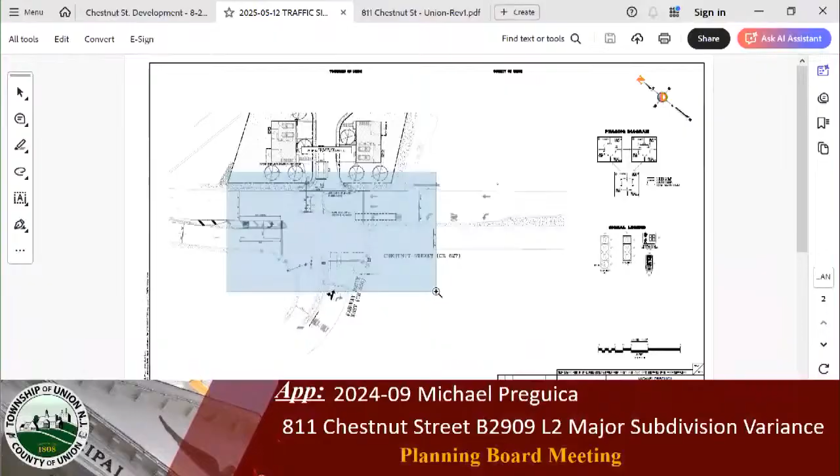Let me zoom in to where I think one of the board members had a concern. You have two lanes going northbound on Chestnut Street, and then it opens up to three, and that third lane is sort of a storage lane for the left turn lane at the next signal. There was some concern whether we'd be eating into that, and I'm happy to report that no, we're not.

With just a slight shift of the striping in the southbound direction, we're able to fit that left turn lane for this property without really changing anything else. So essentially, the way that signal operates now will be exactly the same unless a car is trying to make a left out of our driveway, then they'll get a few seconds of green time and back to the way it was. So what I testified to still holds true, but we've now verified it with this layout.

Those were two good points brought up by your engineer—I forgot which board member was asking about that turn lane—but we're able to verify that we can make that fit. That was really my homework from the last meeting in terms of the traffic signal plan. The site plan was changed to address some county comments, nothing substantial, just some minimal things. We now have county approval for the plan. They'll have to review the traffic signal plan in coordination with the township, but those finer details, like how the wiring goes, come later in the process.

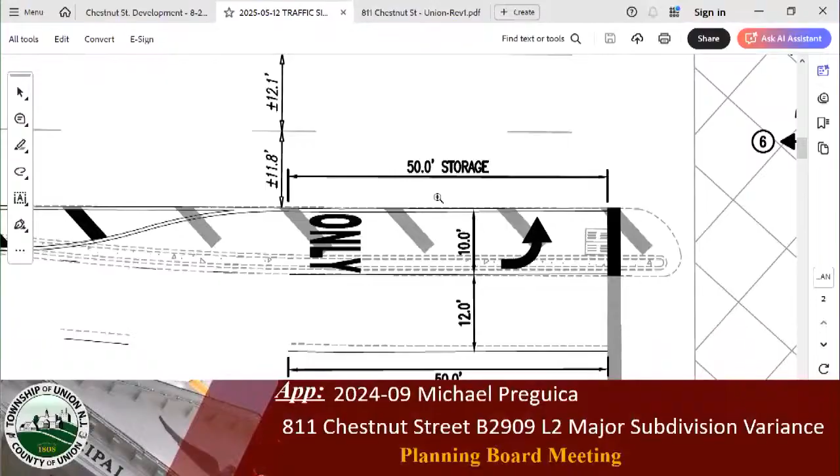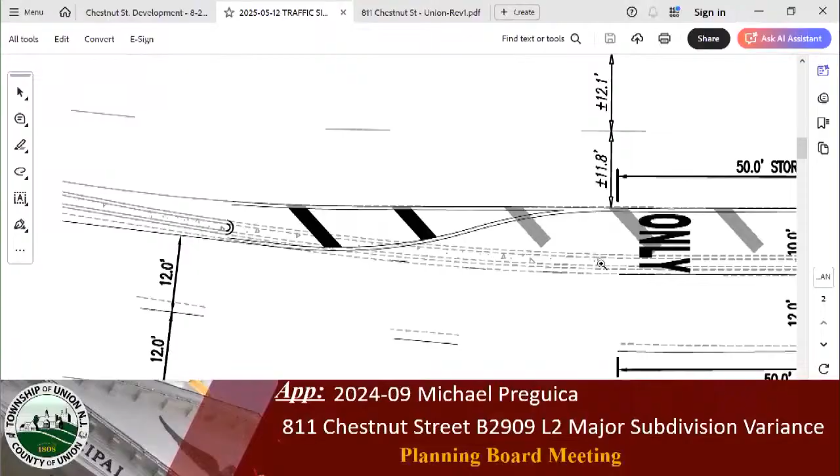And are you removing the cement divider? Yeah, in that section, that'll be removed, and it'll be pulled back to before that turn lane starts. You can see right here, that little bull nose—so this is where the divider is today, where it's dashed. So we'll get rid of that, but not on the northwest side? Correct, not there—still there. Okay, thank you, sir.

Yes, appreciate that, thank you. You asked me last time about that, yes sir. I did, I remember. So just as a follow-up to that, that diagram does indicate—could you enlarge it again? Sure, the turn lane? Yeah.

So you are taking out a portion of the new lane that's created for the left turn at West Chestnut Street, on the other side, under the bridge? No, we're not. Well, it appears that you are, because you've got the dark—this is the lane right here, this is the same lane. See, there's three lanes, this is the lane that goes—but there's actually, what are the dark stripes, diagonal stripes to the left of the last gray stripe?

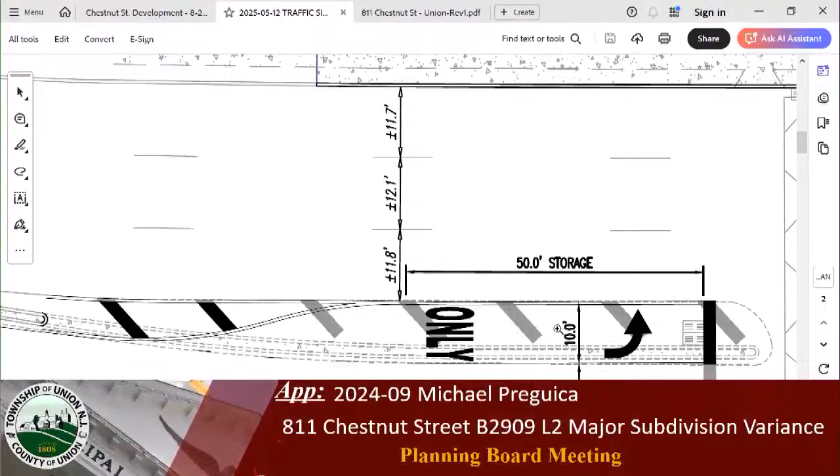Yes, those are the same ones that are there. These two stay, the rest of these lighter gray ones are removed. So that's existing striping? Yep, we meet the existing striping along this side, somewhere right in here.

Okay, I was listening, but I didn't hear you say - will the adjustment to the traffic signal be a 4-way signal now? Yes, 4-way.

So the signal will control left turn lanes out of the property to Chestnut Street South? Yes, if you come out of the property and stop at the stop bar, it'll call the signal and say somebody's waiting there. If you make the right turn on red, it'll cancel that call, so it'll never give green. Only if you sit there long enough will it know you want to make a left or go through, then it'll give a few seconds of green, whatever the minimum we can get away with, since the most you'll have is one car, maybe a second car occasionally, so it doesn't need much green.

And we don't want to take away from the busier traffic. Does DOT have a minimum amount of seconds the light has to be green? For DOT turn lanes, it's 5 seconds, 7 seconds for through movements. This is kind of an odd situation, so if this was a DOT road they might want it 7 seconds, but it's not - it's up to Union Township and Union County.

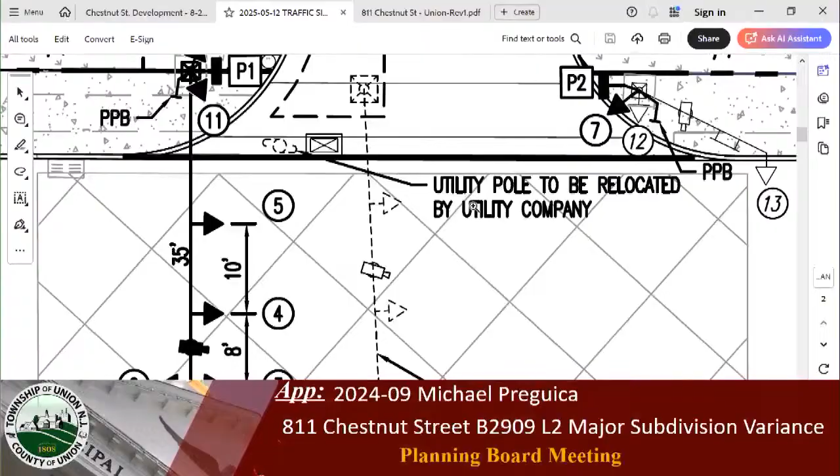There's no crosswalk across Chestnut Street to get to Fairway Drive? Doesn't look like it, no. There is a sidewalk along Fairway Drive. There is on this side, yeah, I see it. No, there's no crosswalk. Okay, thank you.

And there's no pedestrian signals either. This signal pole is existing. There's no pedestrian buttons or anything. So are you saying there's no pedestrian signaling, no ability to initiate a pedestrian call on the intersection at all? Not to cross Chestnut, no. Not to cross Chestnut? Right. The only pedestrian crossing would be crossing the proposed driveway.

But I would think that would be an issue for the local police department and traffic control as opposed to egress from the applicant's property. Right, yeah. There's a reason, when this was designed, that they didn't put a pedestrian crossing across Chestnut, so it would remain to not be there. That would have a pretty big impact on traffic, because that's a long crossing, so you'd have to have a fairly long walk and flashing don't walk for that. I would think that's probably part of the reason why. And I don't know if there's that much pedestrian demand across that.

So let's say if you are a family from the Fairway Drive area, that means there would not necessarily be any safe route for them to walk from that neighborhood to Connecticut Farms School. Can you cite any path whatsoever that would be a safe way for them to walk from the Fairway Drive neighborhood to the school? No, I wouldn't have looked at that. That has nothing to do with this project. Whatever it is today is the same. Exactly, we're not changing the pedestrian patterns here, so they're staying the same. The only difference is when you're walking on the sidewalk on the north side of Chestnut Street, now you walk across a driveway to 6 units, that's it.

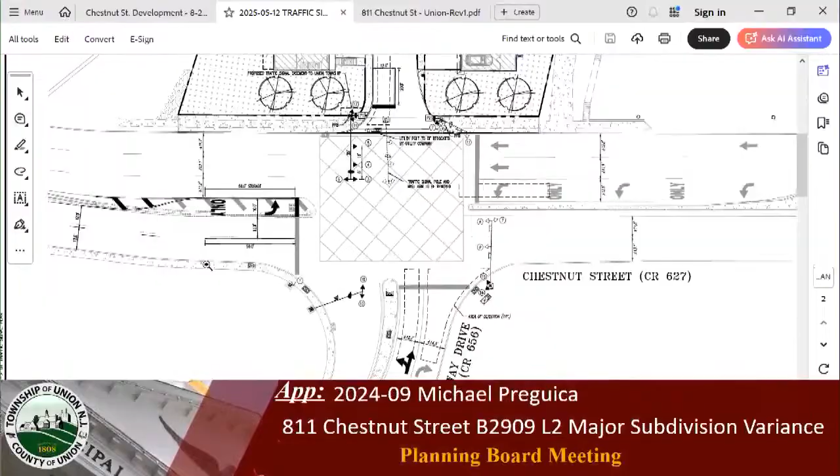Okay, so going back to where you're saying you're going to make that lane a turning lane - the traffic coming off of Stuyvesant Avenue onto Chestnut, those are already 2 lanes that are there, right? And will those lanes now be narrowed just to add that 3rd lane there? Yeah, the rightmost curb lane will be 1.5 feet narrower, yes.

It's extra wide now.

I have a lot of questions. I'm just trying to go through so I'm not repetitive. All right, I'm done with my questions. I have more statements towards the end when it's public comment. Thank you.

Thank you. All right, would you like to call your next witness? Yes. I will be calling our architect, Chris Juchnick.

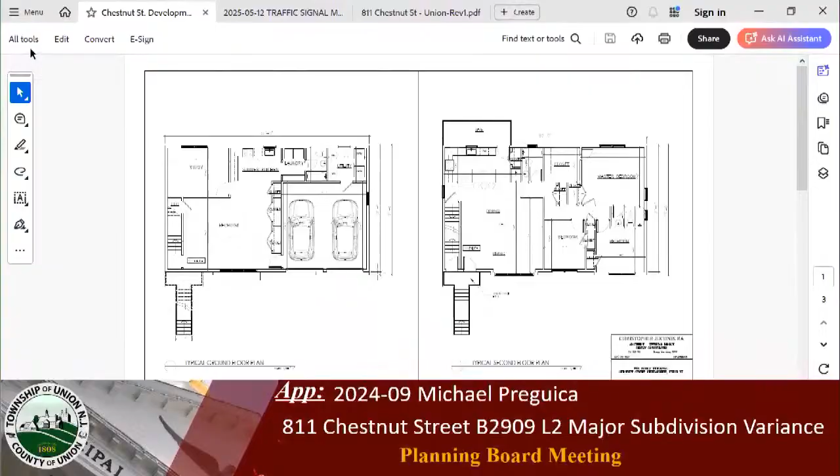Can you take us through the floor plans, please? You should have A1, up on the screen now, showing our typical ground floor plan. Typical meaning it's the same for 3 houses, three two-family houses, giving us 6 units, not 6 houses but 3 two-family homes. On the ground floor we have a double garage off to the right in this particular plan. Next to that we have a rec room, a study, a summer kitchen, a laundry area, and a bath and utility area. Then we have the staircase bringing you up from the ground level directly to the second floor. It's directly interconnected - there are no other entrances on the ground floor from the outside other than the garage doors.

As you come up the stairs from either the ground floor or from the exterior, you have a wide landing upstairs allowing you to enter the one door into the second floor apartment, or go left into a staircase up to the third floor apartment. We have the entrances separated on the outside of the building so we don't have to sprinkler it. If you have your entrances on the exterior, the IRC 2021 New Jersey edition does not require a sprinkler system as long as all fire ratings are maintained throughout the building, which we would of course do if this is built. This is very typical of many, many homes we design and construct.

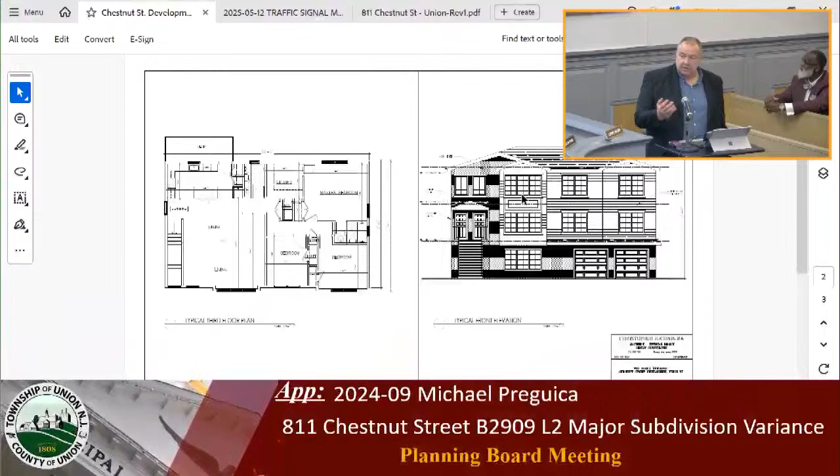Then we have our front elevation. We drove around the neighborhood - there's that little development off to the side, which is a mixed bag of different designs from a couple different time frames. We actually designed the owner of this property's house off to the side, the gray-blue house with the siding. That's the same kind of siding we'd propose for this building, the horizontal Hardie plank board, a nice architectural feature. The rest of the front would be brick, with some accents on this projected window, like a larger bay that comes out, giving the building a bit of a 3D effect.

Coming around the side, it's just going to be Hardie plank siding, with the bottom level being plaster over the block. The block would be up to the second level, and the rest of it will be frame. You can see the profile of the decks that we're proposing on the rear, and here we can see the actual decks themselves.

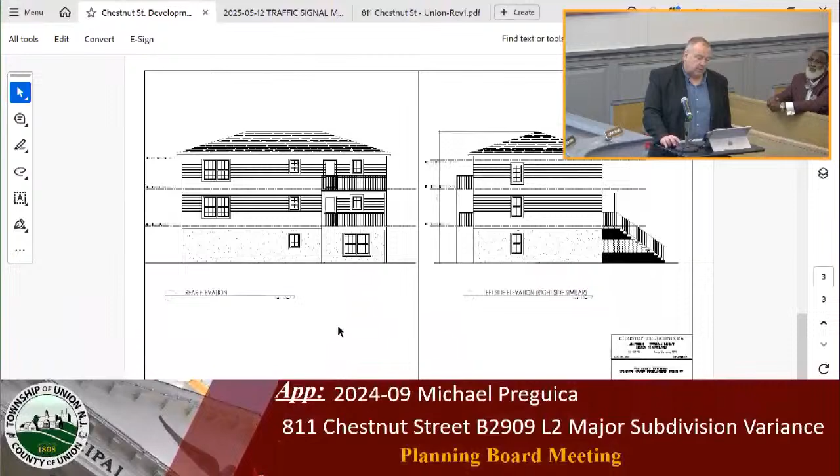As I mentioned, we're very cognizant—we do a lot of drawings in urban areas, and one of the biggest concerns is having direct connectivity between the ground floor, which we usually call the owner's unit, and that second floor unit. So there's direct connectivity and no other access other than from inside the unit, to try to dissuade people from making illegal apartments. And that's basically the building.

Can you please describe how we're complying with the energy conservation ordinance? Yes, so we are required under a federal mandated program called the Res Check. We have to run the numbers on these.

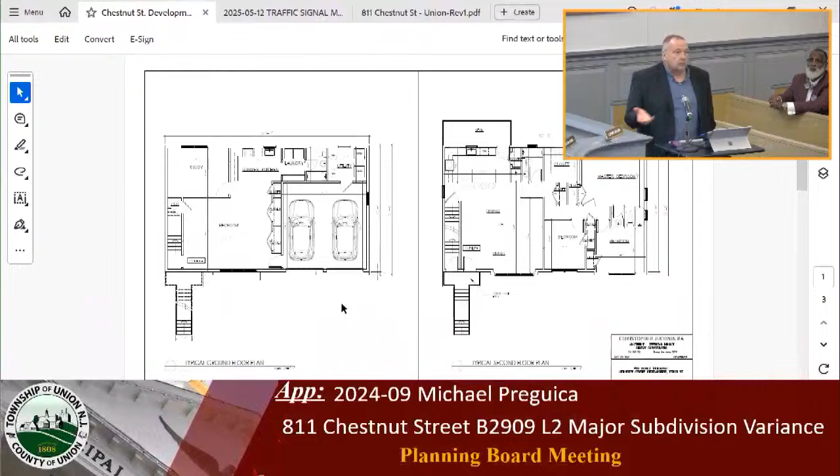Nowadays it has to be 2x6 construction on the outside walls, which allows us to put a certain amount of insulation inside. We also usually put insulation around the outside. The attics are insulated about twice as much as houses used to be. And we'll be using LED lighting throughout, so all of the materials are compliant. Once you pass that Res Check, the building is pretty energy compliant.

And we have no problem complying with Collier's report or any other comments the fire department has—we should be fine with all of that. Perfect, no further comments or questions? Okay, we'll now take questions from the board.

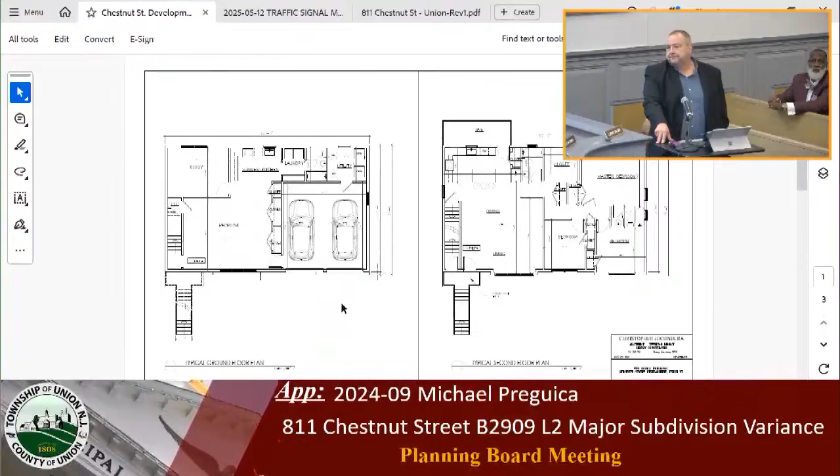If I can kick off some of the questions here, and I'll defer to other board members—so you have read the engineer's review letter, right? Yes. And just confirming, comment 3.1 of the engineer's review letter states the ground floor is shared by the families living on the second and third floors for garage parking, recreation, laundry, and summer kitchen purposes. That's correct? I'm sorry, yeah.

No, so the ground floor is only shared by the second floor. I actually didn't realize—I must have read that a little too quickly. The ground floor is only interconnected between the ground and the second floor. The third floor has a separate entrance and has nothing to do with communicating with the lower level. Okay, because the second floor is the only floor that would have access to that ground floor without needing to go outside. That is correct. Okay, thank you for that clarification.

So based on your plans, in that ground floor area, in addition to the laundry, the quote-unquote summer kitchen, study and rec room, you also have a full bathroom, right? That is correct, yes. And that full bathroom consists of a toilet, bathtub, shower, sink, et cetera, right? That is correct, yes, it is a full bathroom.

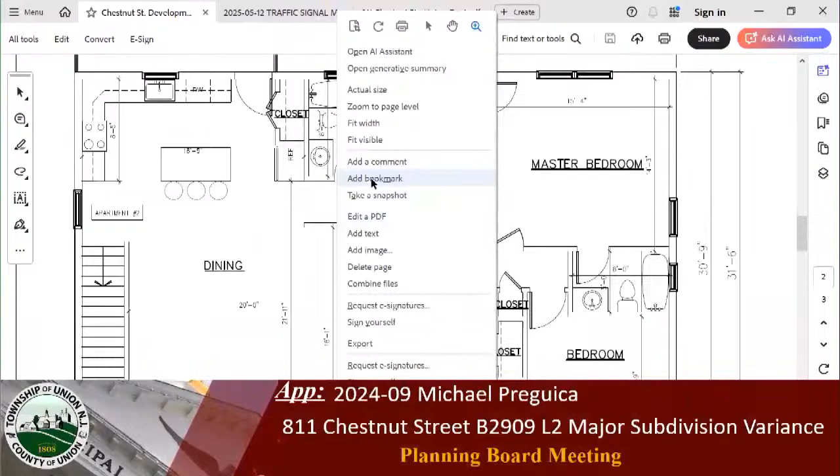So you've got 10.3, I'm sorry, go ahead. It's a 9-foot ceiling height for the second floor, and 8 feet for the third floor. 8 feet, 9, 9, 8. Okay, so what is the overall dimension? Looked at a dimension to the side. What does that say on the elevation?

34.6. Okay, the maximum permitted building height is? I'm asking, that was the question. What is the maximum permitted building height per the RB? 32, I'll tell you, 32, yeah. So you're asking for another variance in height, correct? Yes. Okay, I didn't understand that as being one of the variances.

What percentage did you pass your res check by? Do you recall? We haven't done the res check yet. Oh, I just thought you mentioned you did a res check on this building. We do the res check when we do the construction drawings, that'll let us know whether or not. So how do you know you're passing the energy code? Well, the house itself, the actual guts of the house haven't been designed yet. So the insulation, more than likely, when we do the res check it will let us know, due to the square footage of the house and the windows, how much exterior insulation we'll have to put on it. We already know 2x6s only receive R21.

We can get about R60 up in the roof. Understood, that's the best we can do. Acknowledged. So the exterior envelope could have anywhere from a quarter inch up to an inch of exterior insulation, exterior continuous insulation, am I correct? Yes, you are. Is that what you're, I'm asking you to tell me. Yeah, continuous insulation. Okay, so you're going to have continuous insulation on the outside, then cavity insulation of what, between the studs? The 2x6s, sir. Yes. Okay, what would that be?

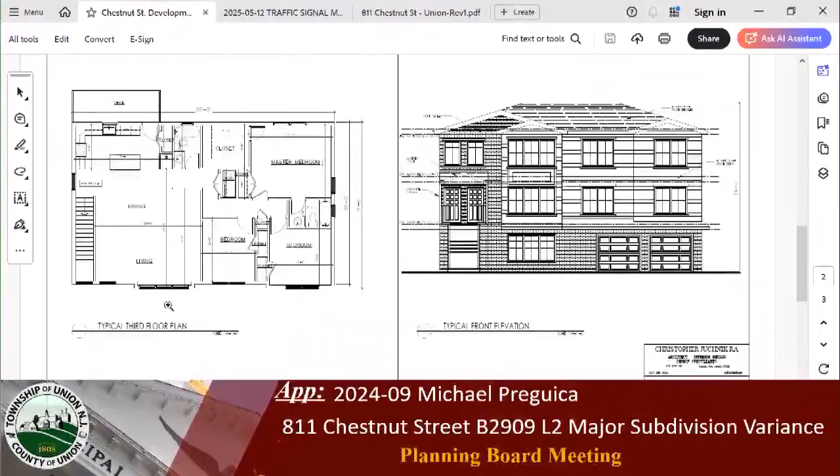The entire apartment, it's continuous. So the stair is not rated, the entire apartment is rated? That's the question. Yeah, it's rated as an extension of the staircase, I guess you'd put it that way. Because that's not a rated stair.

Because the thing is, a rated stair has rated doors. Is it a question? I understand it's a question, but I'm following up. What's the question? I just asked the question, and what I'm saying is that the stair is not compartmentalized, therefore it is not rated.

It doesn't need to be rated from itself because it's one continuous path of egress that runs from its own unit straight to the exterior. So that's how it's rated, not in itself.

The definition by code of a rated stair is: a rated stair is compartmentalized, and a 1-hour stair has a 3/4-hour rating, a 2-hour stair's got a 1.5, and you know that. So therefore, that stair would need to have a door that is a rated door for that to be a fire stair. But it's not required to have a door, therefore it's not a rated stair. Am I correct?

I get that, and at one point I said I don't want this to be a grilling session. No, I am, but I'm not getting answers, ma'am. So that's why I'm trying to.

Does a rated stair need to be compartmentalized? A fully rated stair has to be compartmentalized, yes. So is that a rated stair? It's not a rated stair for its purposes, no. Okay, so it's not a rated stair, correct? I'm not exactly sure what it has to do with this application, but... You're right, it's not. Okay, that's what I'm getting at.

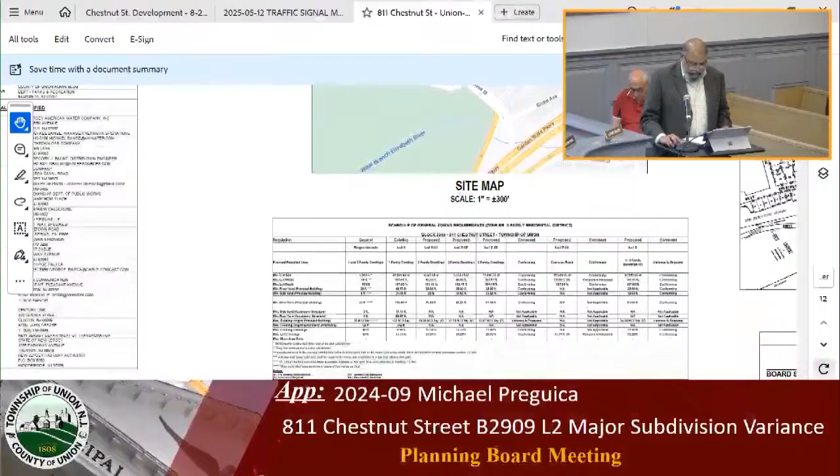The property is located in the RB2 Family Residential District. Currently it's one single lot. The proposal is to subdivide the lot into 4 lots. 3 lots will be for residential, 2 family dwellings, as you heard in the testimony. The 4th lot is a common lot, under common ownership or HOA, consisting of the access roadway, lighting, street lighting improvements, and circulation and additional parking.

Since the total unit count is 6 residential components, we automatically qualify for and must comply with the New Jersey State EV requirements, as we're over 5 units. We are proposing EV charging stations, and we can take credit based on what the state gives you, 10% of the required. Adjusting those parking numbers, the requirement is 14 spaces for this project, and we are proposing 18 spaces.

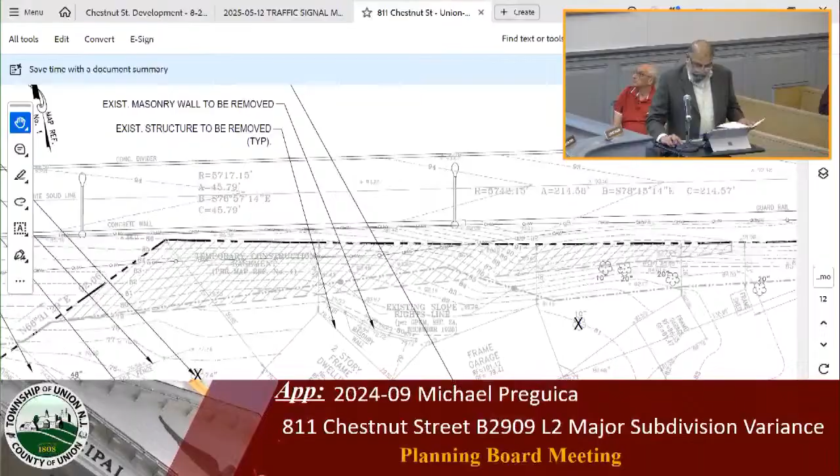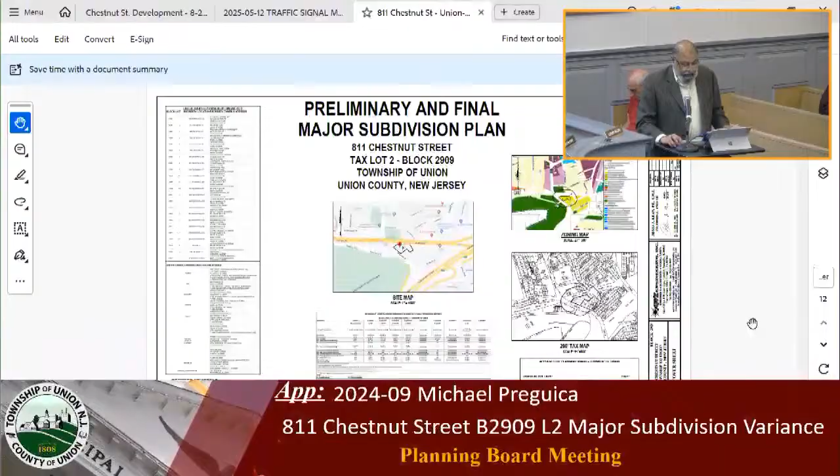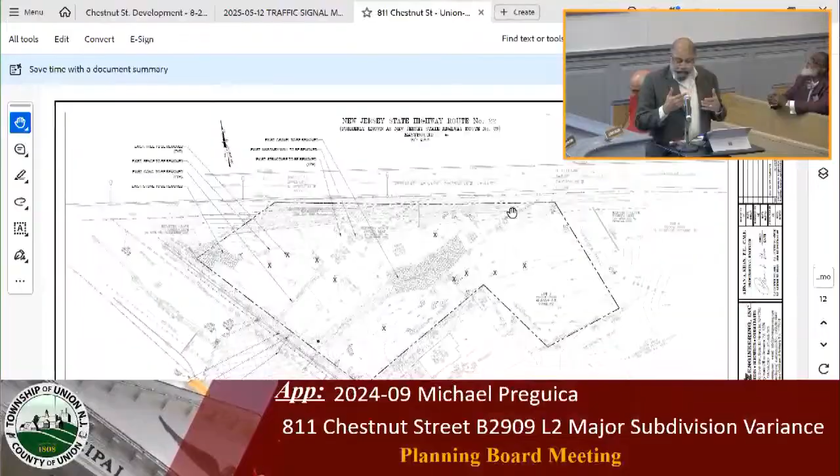The sheet in front of you is the existing site as it currently exists. As I mentioned, it's one lot, and it extends north to Route 22. Since Route 22 is to the north of the site, we have a DOT embankment easement along the northern property line, shown in the shaded plan. This area has restrictions - we cannot touch it, develop it, or do any grading there, because it's an embankment easement from DOT for Route 22. So the area available for development is anything outside that easement portion.

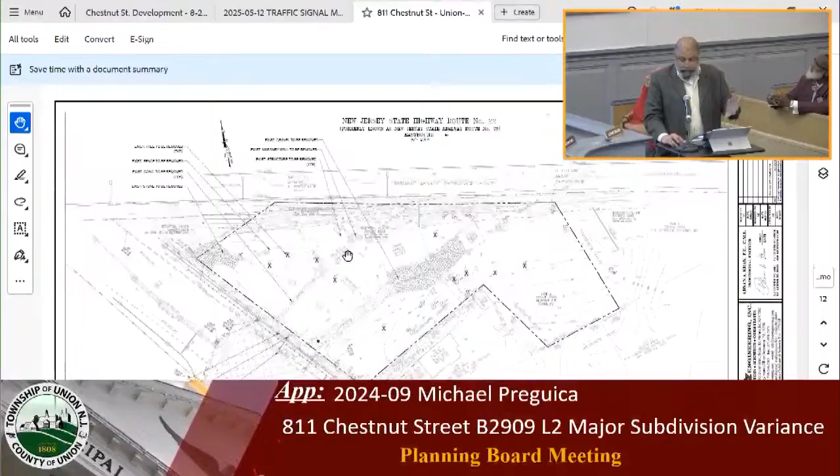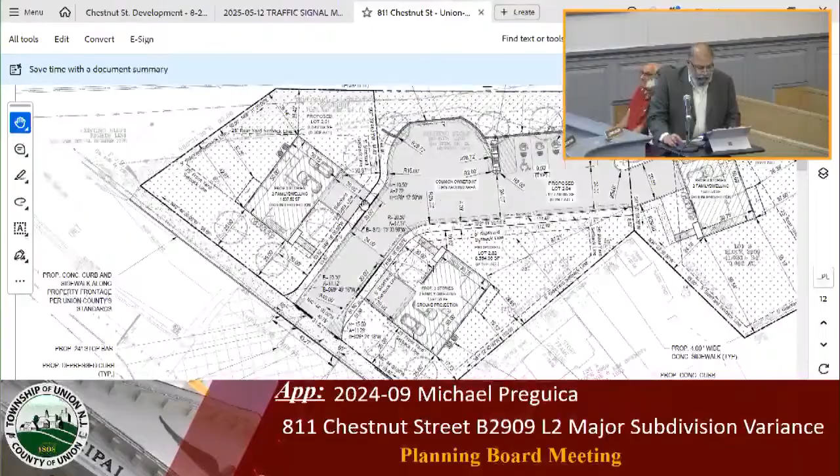The way we are proposing it, we will have access from Chestnut Street, through what we're calling lot 2.04. The 2.04 lot mostly consists of the access driveway, circulation, a turnaround, additional parking, and access to the driveways for each dwelling unit.

The rear of lot 2.04 is partially the DOT embankment area, and we're leaving it as green or pervious surface, doing some planting there for landscaping purposes, like shade trees and shrubs. The residential lots are lot 2.01 to the west, 2.02 to the east, and further east is lot 2.03.

As you heard from the architect, the houses are pretty much identical, and there was a question regarding their placement. There are a couple of reasons we placed the houses like this. First, the bulk requirements - we have to maintain certain setbacks, rear and front, so that was one of the main reasons to comply with the bulk requirements for this project.

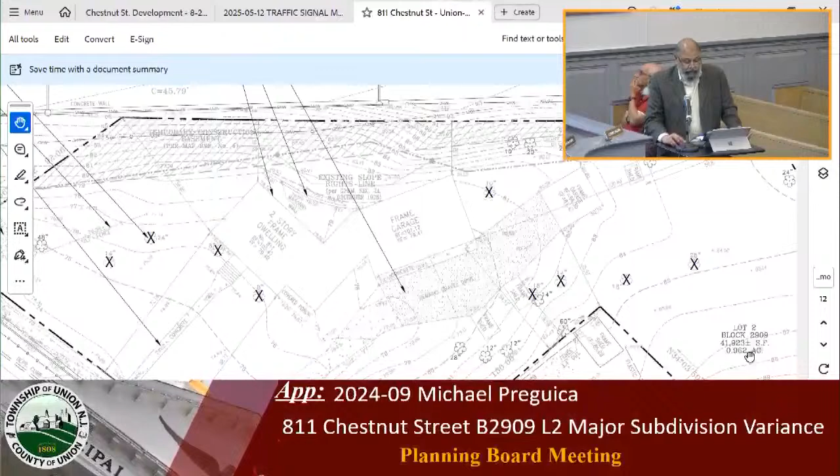The other reason, as you can see in the existing conditions plans, the site slopes considerably from north, where the Route 22 embankment is, all the way up to Chestnut Street. There are very steep slopes present on the site, so the consideration was to provide a flatter area for the lots which will have residential houses.

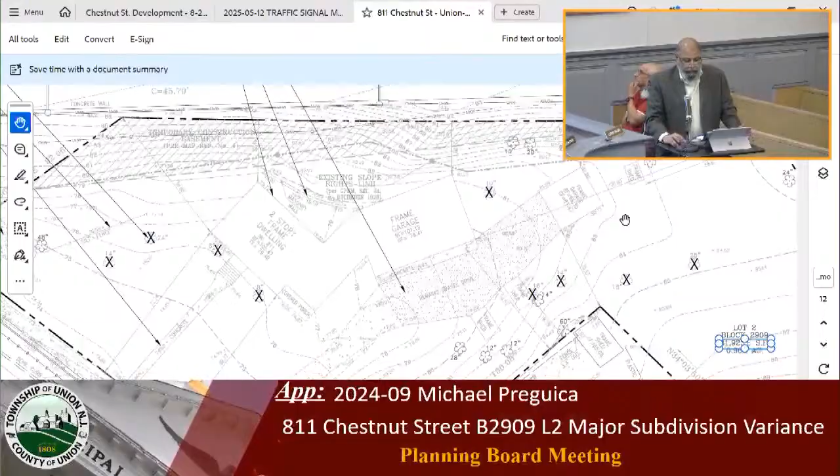The third criteria was circulation, having easy access from the proposed driveway that will serve 3 lots in and out of the driveways for each individual lot. All these criteria blended, and we found this more acceptable as far as grading, elimination of bulk variances, and safety and circulation of the driveway. Once you enter from Chestnut Street, we have a full-service driveway, 24 feet wide, a standard two-way driveway serving vehicles entering from Chestnut.

We have individual driveways for lot 2.01 and 2.02, where owners or tenants can make a right or left to get to the garages and driveways. Further up, we are providing additional parking spaces and EV charging spaces. These are common parking spaces for guests or other individuals who might be visiting, or any deliveries coming into the property. And then the driveway that serves the last lot, the easternmost lot. We are providing one handicap, van-accessible space which is fully compliant, and also the trash, solid waste, and recyclable area right here.

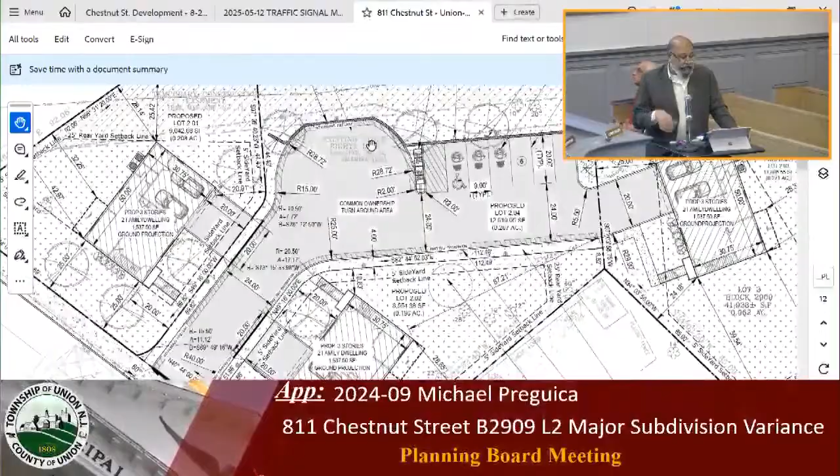We are proposing a turnaround, and when I go through my circulation plan I will show how that works. The idea is that this turnaround area is designed to accommodate a fire vehicle or fire truck to enter the site in case of an emergency, with enough room to turn around and leave Chestnut Street.

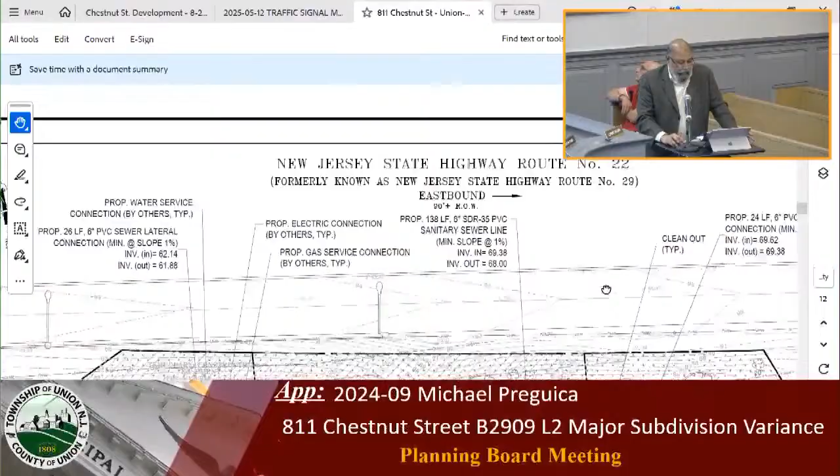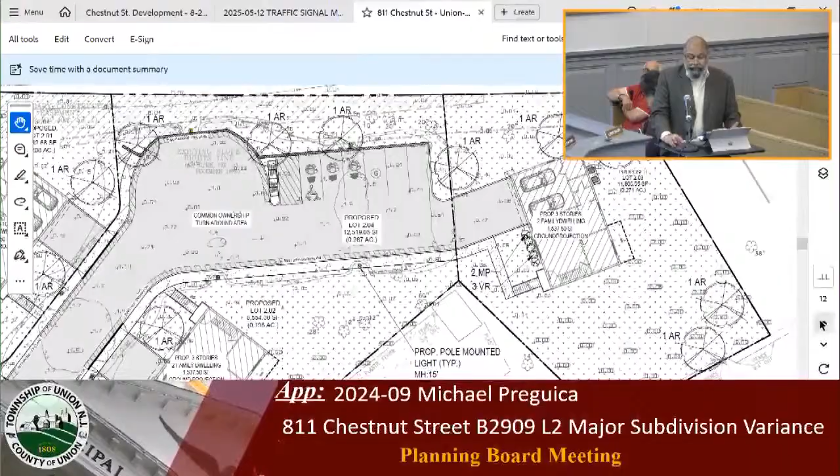We are proposing all new utilities. One thing I want to touch on before going further is that before we finalized this layout, we had a couple of meetings with the town engineer, I believe it was Mr. Hedger at the time. We presented quite a few concepts to him and got feedback, and this was the concept we all agreed on, and I believe we got the blessing that this was the more doable concept.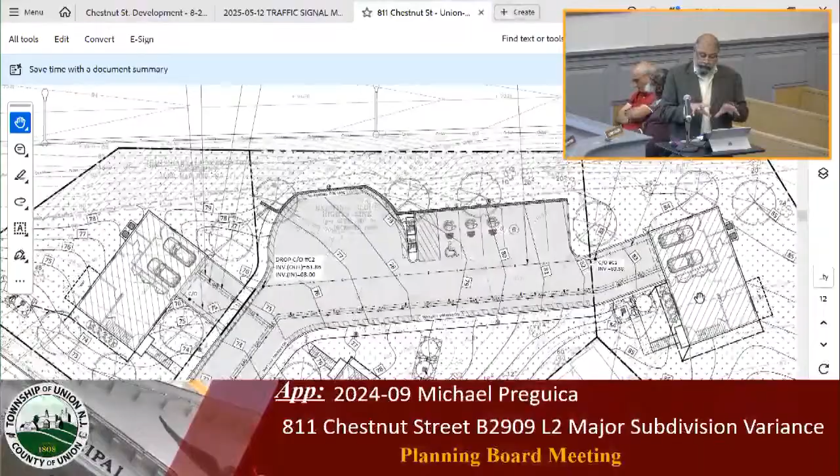Originally we started with the municipal roadway. Because we have to run all the new utilities from Chestnut, including water, gas, electric, sewer, as well as the stormwater management system for the individual houses and the roadway lot, it was discussed and decided that it's better to have a private road so that owners handle all maintenance through the homeowner association. So just a brief history, this concept went through quite a few iterations, and finally this was the one that was signed off, and we proceeded with the design of this project.

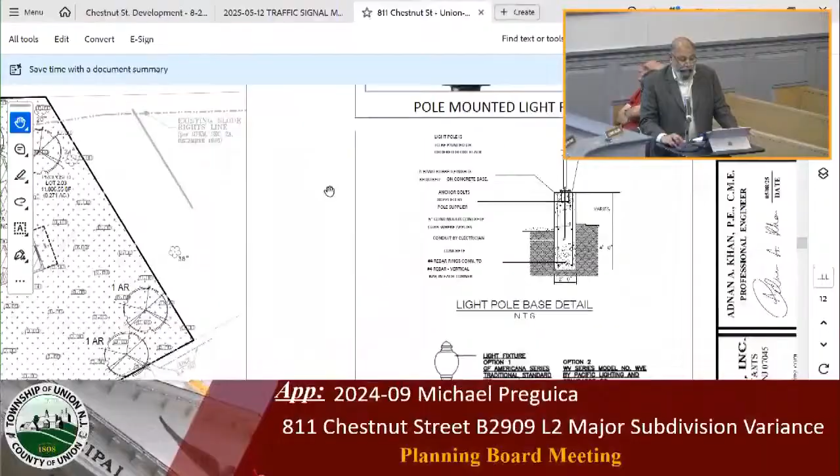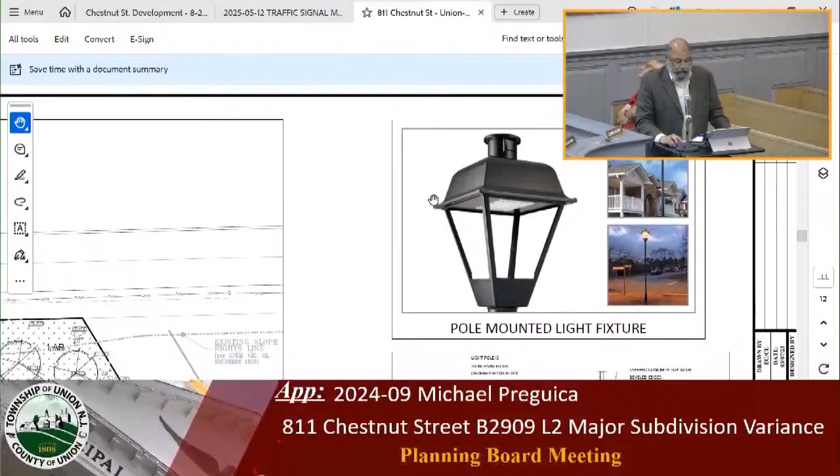The next plan is the lighting and landscaping plan. We are proposing a good chunk of new landscaping, including evergreen and deciduous trees, plus some shrubs. We are also proposing decorative street lights. The fixture we selected gives a more residential look for the driveway, rather than looking like just another driveway entrance, giving a more residential development look. These lights are all LED fixtures, and we prepared a lighting plan which complies with the requirements.

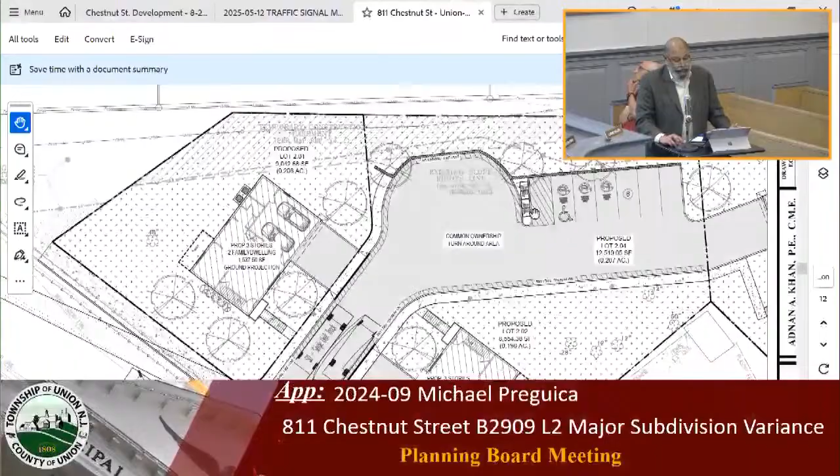The other plan is the fire circulation plan. We ran the template for the fire truck, which shows it can enter through Chestnut Street, access any of the three houses, and then back up into the turnaround area and leave Chestnut Street. The same is true for passenger cars or delivery vehicles, which have ample room to circulate without backing onto Chestnut Street.

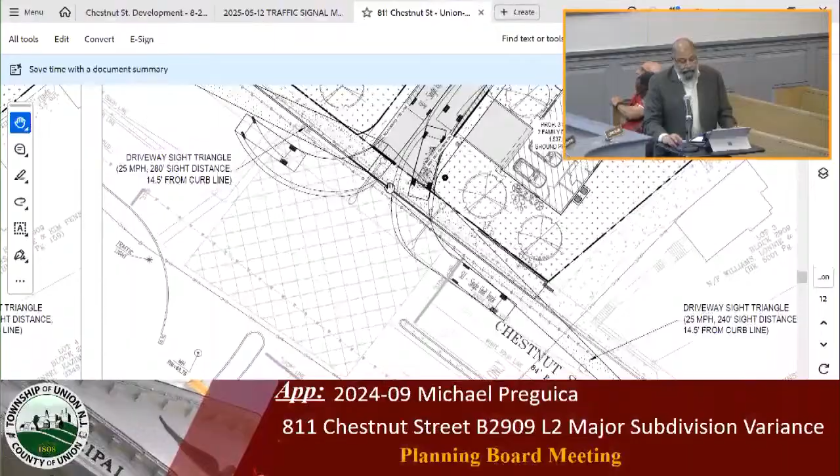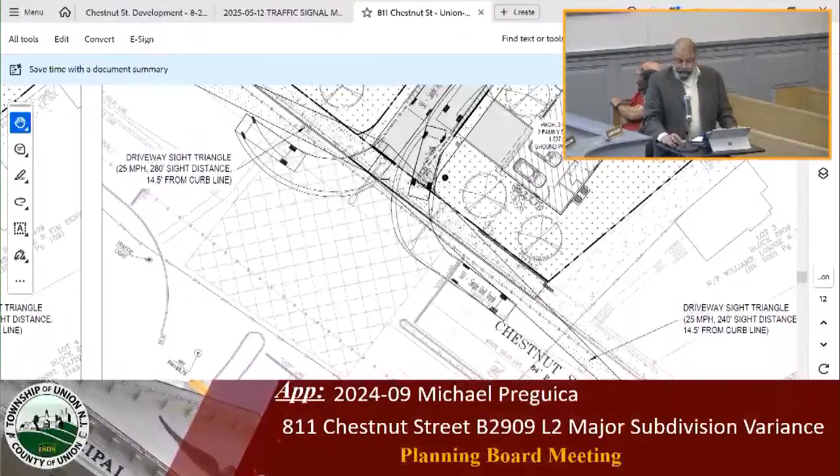As part of this project, we also contacted the county. Chestnut Street is a county road, however, our traffic engineer went through the details about the traffic signal and alterations to it, which are under the jurisdiction of the township, not the county. We got a letter of exemption from the county stating they're not concerned with this project.

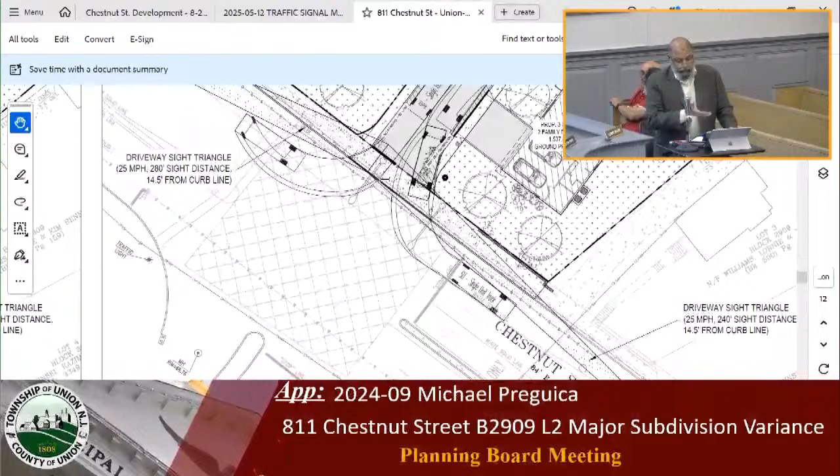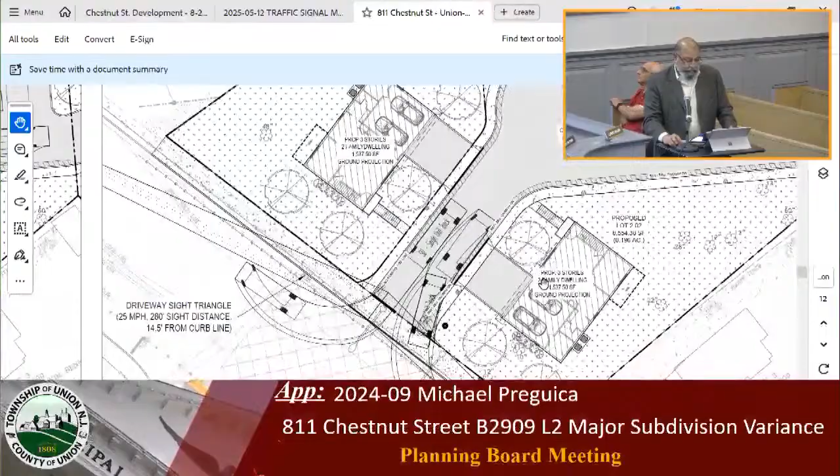It's not going to impact any of the county infrastructure, whether it relates to the traffic light or stormwater management. So we pretty much comply, and they give us a letter of exemption for this project. We did receive a letter from Collier's Engineering, and some of these comments are already incorporated into the plans, but most of these comments are mostly housekeeping type comments, which I don't see any issue with. If this project gets approved, we will comply with these requirements.

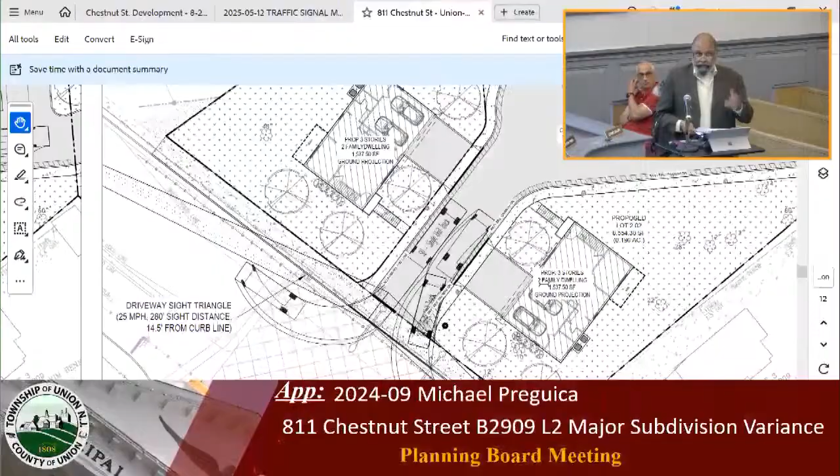I believe, and I'll take any questions if anybody has any. No further questions for him. Okay, questions from the board? We'll start with Mrs. Khan and then Committeewoman Terrell.

Can you elaborate more about the drainage system that you're going to put in this? Sure. As you may know, Union Township has very strict drainage requirements, where usually they require a much larger system to capture a certain amount of rainfall. So we designed these drainage systems in accordance with the township ordinance. If you look at the plans, each lot will have a dry well system, which basically consists of 2 dry wells, and all the roof leaders for each house are tied into that dry well system. This is one of the systems we designed, called an infiltration system.

Of course, it heavily relies on the permeability of the soil. One of the comments from Collier's Engineering is that we need to do soil testing to make sure the permeability of the soils in the project site will work for this dry well system, which we will do as part of the resolution compliance. In case the infiltration system doesn't work, we have an option of going to a detention-based system, which basically consists of pipes that can hold the water and then slowly discharge. So there are options, but for now we are designing the infiltration system.

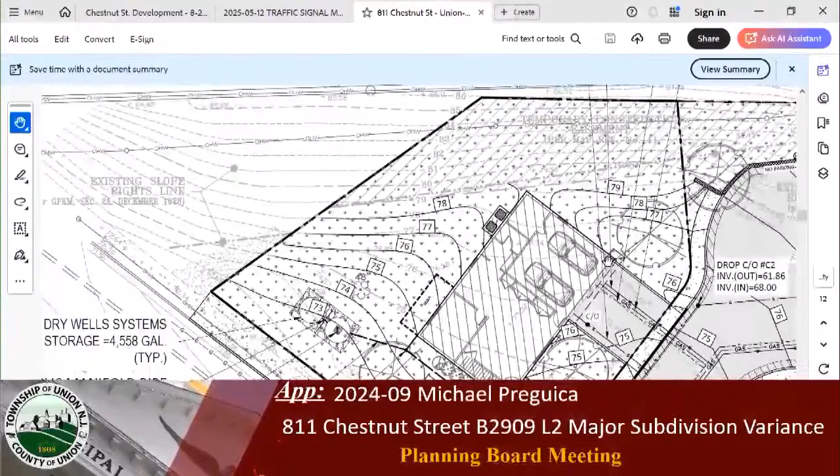either retaining walls or anything to make the topography flatter? If I may, could you just go behind the first building? Go to the other one, the other way. That other way, right? Correct. Okay, so look at all these contours that are very, very close to each other. They're, I would say, within 5 feet of each other, would you say?

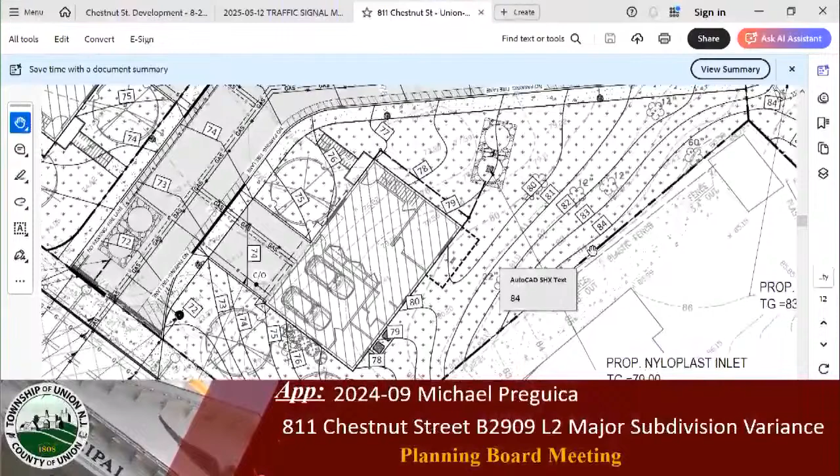So you've got a foot drop in 5 feet. Would you know what that slope is? I would say 1:5, I believe. Yeah, there you go, 20%. It appears that, besides it being hard to mow, you're going to get a lot of storm runoff with that steep of slope. So entertaining retaining walls, would that not alleviate that? That's the question. Not necessarily.

Because again, there are a couple of things when we do grading, there are certain drainage standards that we have to maintain. We cannot just change the direction of the existing runoff flow or runoff area. So you have to maintain certain aspects, because otherwise, if you put a retaining wall, the water is still going to run off from this surface. If it's not coming to our house, it's going somewhere else, someone else's property, or maybe to the street, and it's going to start impacting the neighbors. That's the reason there are certain standards or principles that we have to follow when we do the grading. I understand that.

I'm just looking at this, and again, I'm seeing the slopes that I'm seeing, and it just appears that you've got a hill and then a flat portion, if there was any opportunity. Okay, can we look at this, the handicap space?

Was there any rationale to having the handicap space cross the flow of traffic? If I'm handicapped and I'm getting out of that car, I've got to cross the flow of traffic just to get to this house. Yeah, but it's probably not one of those ShopRite kind of traffic situations we're talking about. It's a residential 6 units, not a constant flow in and out of those spaces. But handicap space is a requirement by zoning, right?

Correct, by the federal government. So that is a requirement, and you're meeting the requirement. But your location is crossing the flow of traffic - that is my only observation. There are no restrictions as far as where it can be, except for feasibility. It has to be the shortest distance to the access. That's the only restriction.

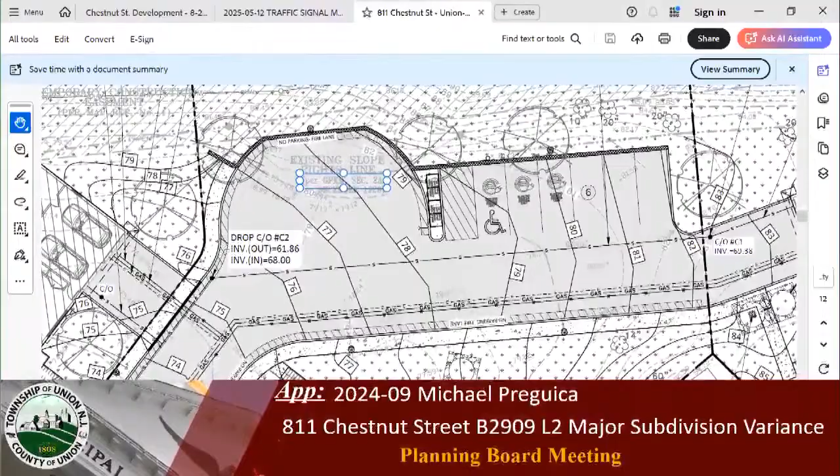A lot of trees, thanks - we like trees, that's good. Could you go towards the front? Do you have any concerns about any of these trees impeding visibility of the traffic on Chestnut? No.

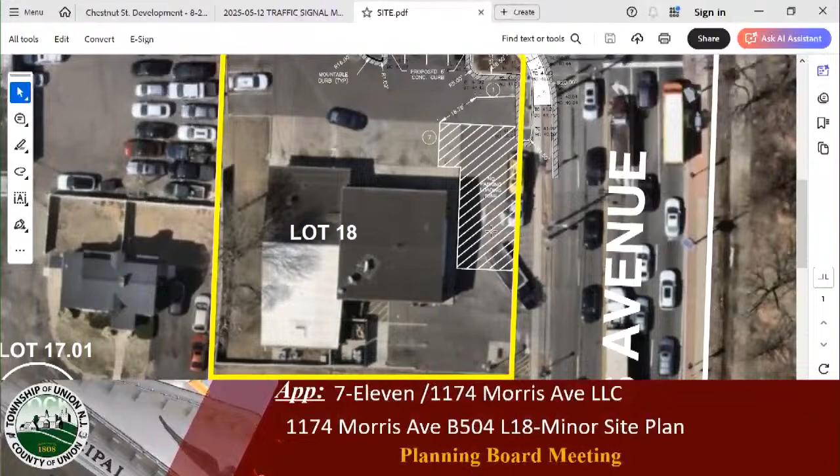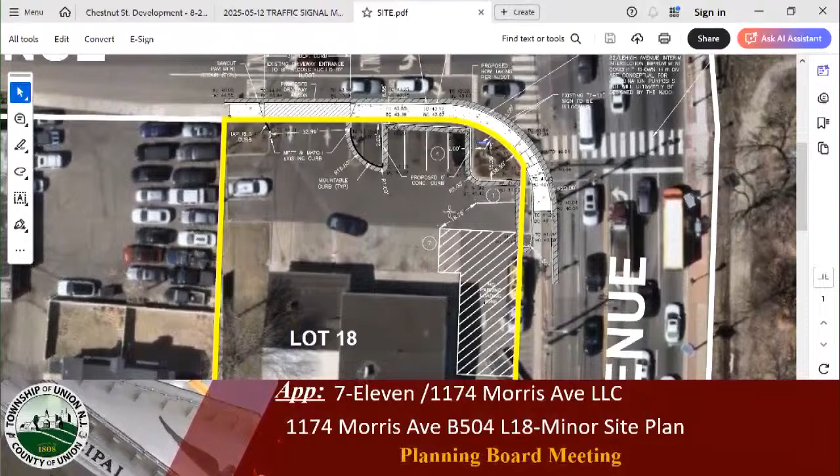While I have you right here, could you explain the reason for the striping and the loss of that parking space? Yeah, it's all relative to truck circulation. What used to happen is, on Morris Avenue there were two egresses, so a truck could pretty easily angle in through one egress, utilize the loading zone, and pull straight out back onto Morris. That's not feasible anymore, so the main entrance we anticipate being used is Lehigh. That was widened, and some of the curb radiuses were increased to allow for a smooth transition around this curve. This parking space here, we've increased the loading zone striping to prohibit anyone from parking there, making it easier for a truck to make this turn and access the loading zone, then pull out onto Morris Avenue through that existing curb cut.

Now, I know we have our outline, but I'm going to jump off it for a minute. Could you pull up those truck templates that we prepared? Mr. Merman, can we mark that as Exhibit A?

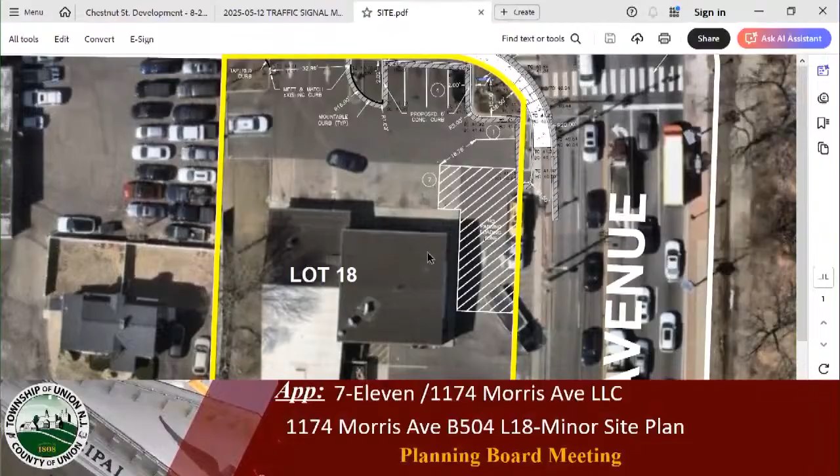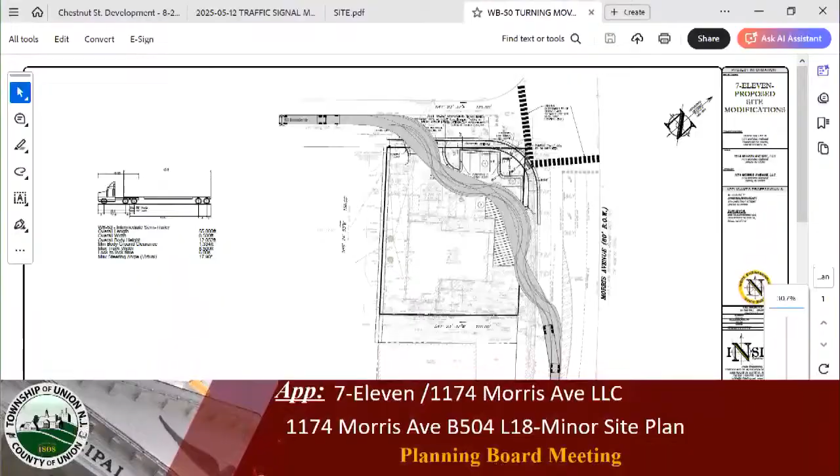Here we have what's known as an intermediate semi-trailer. The WB50 is the design vehicle, the most common delivery truck to the site. We show the movement here from Lehigh Avenue through the new modified entrance, making a turn, avoiding any parking spaces, entering the loading zone, and ultimately leaving back out onto Morris Avenue.

That is not a box truck. That is a tractor trailer. It's not the largest design vehicle that's out there. Obviously, that's the WB62. That's something you would see more, arriving at a warehouse with the full sleeper cab in the back. This is more of a multi-stop day vehicle.

So we do have a turning analysis with the WB62 as well. It is possible. I don't anticipate that it'll be used very often, if at all, but we do have that turning template as well. Does that other turning template accommodate the movement as simply as the one you're showing the board right now?

Close to it. There's a few spots where we did need to use mountable curb, particularly on this curb island, but it is able to navigate the site given the modifications. So the proposal is to use the modified curbing to allow these trucks to access without damage to the trucks or to the property. That is correct, yes.

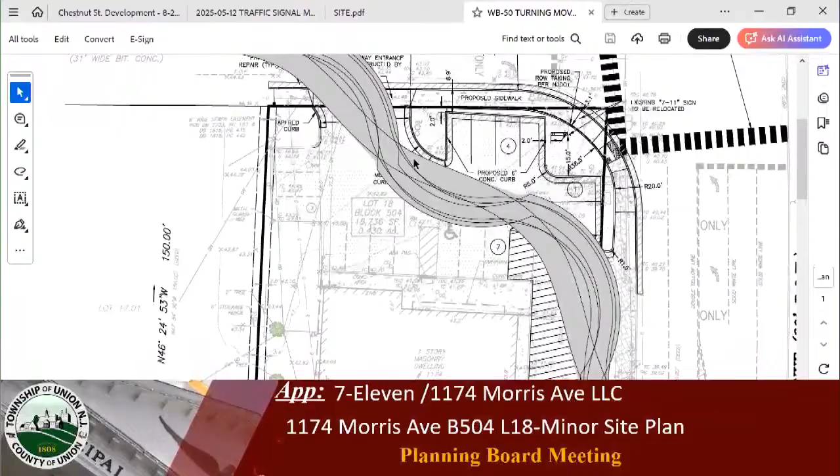Now, we had an opportunity, did we not, to review the effects of the changes with the operator, 7-Eleven? And we did. Just run through those with the board? Yes. So they've spent a lot of time watching how things have worked since the DOT made their changes. That elimination of the one egress on Morris Avenue has greatly impacted them.

It's created a situation where the trucks are having a difficult time entering, probably needing many, many movements to get into the loading zone. And then even sometimes when they're getting into the loading zone, they're not properly oriented and are causing a bit of poor circulation for the other vehicles on site.

So we do feel that the modifications proposed will allow the truck to get in there and pull closer to the building, to allow cars entering from Morris to be able to circulate the site better. But yes, from what we've seen and what we've witnessed, photographs were shared with me. Basically they've told us that it's not wide enough for two cars to enter or exit at the same time. And we believe this will make it much better.

Now, I just want to run through the variances with you that were created specifically by this DOT action, as well as the ones that have previously been approved. Let's start with minimum lot area. In the original approval, there was 0.430 acres, 18,736 square feet. That was reduced by the taking?

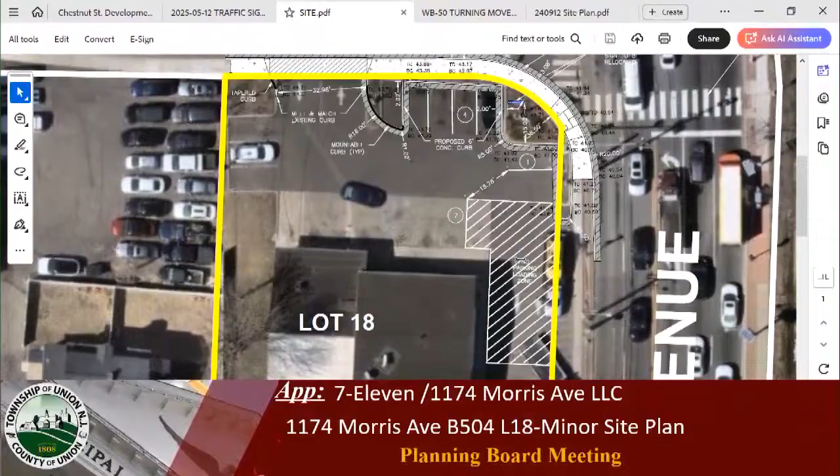The difficulty is practicality, right? It's whether the driver is going to get over there as far as possible to allow that to happen. One thing I will say, the 3 parking stalls below, in the original approval, were designated as employee parking. So I would imagine a lot of the in and out is going to happen on Lehigh. But again, our goal here was to try to improve a difficult situation for the applicant.

Do you have any information on how long? I know you said there's 4 deliveries, 2 are overnight. The 2 that are during the day, is there any information on how long those deliveries typically take?

I think they're relatively quick, just based on experience, probably 10 to 20 minutes for them to unload. They come frequently, they're there pretty much daily, so they're not unloading a whole lot, and it can usually be done pretty quickly. Okay, thank you.

Any further questions from the board? Questions from the public? Would you like to call your next witness? Gabriel Baylor.

Yeah. Right, she's all yours.